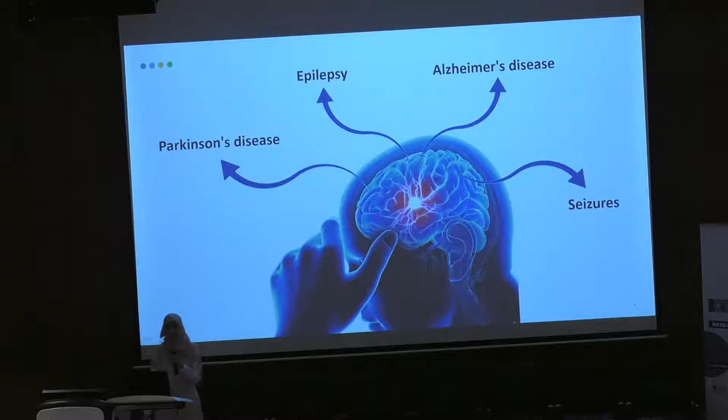Neurological diseases include Parkinson's disease, epilepsy, Alzheimer's disease, and seizures. So a common way to treat these diseases is using prosthetic intervention. When we talk about prosthetic intervention, we consider many issues, including signal resolution, surgical intervention, and host response.

Signal resolution is when we want to record the activity of the cells from a single cell. Surgical intervention is when we want to remove the device from the brain or the neural tissue when the device is not functioning. And the host response is the inflammatory response when the device is not compatible with the tissue, or we have a mechanical mismatch.

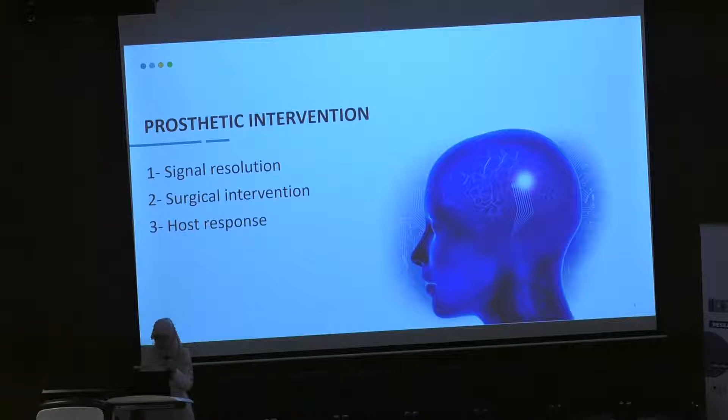So our solution is making an inkjet-printed biodegradable device that is capable of measuring single-cell resolution. Our unique technology depends on inkjet printing. Inkjet printing is a technology that uses piezoelectric material that changes shape when voltage is applied. When the voltage is applied, the droplet of ink is ejected, and we can print some patterns.

What is unique about this technology is that we can deal with low temperature materials, and we can allow a wide variety of materials to be used. It is also suitable for multi-layer deposition.

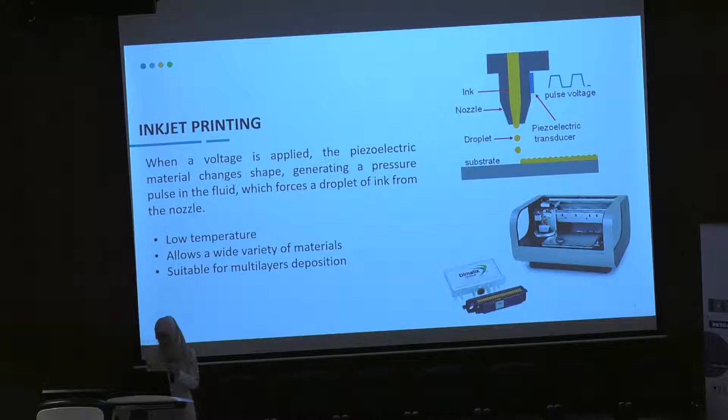When we talk about signal resolution, it means that we want to record the activity of the neuron from a single cell. In order to do this, we need to use microscaled electrodes. However, when we reduce the size of the electrodes, we increase the impedance, and therefore the thermal noise will increase, and we will get a low signal to noise ratio.

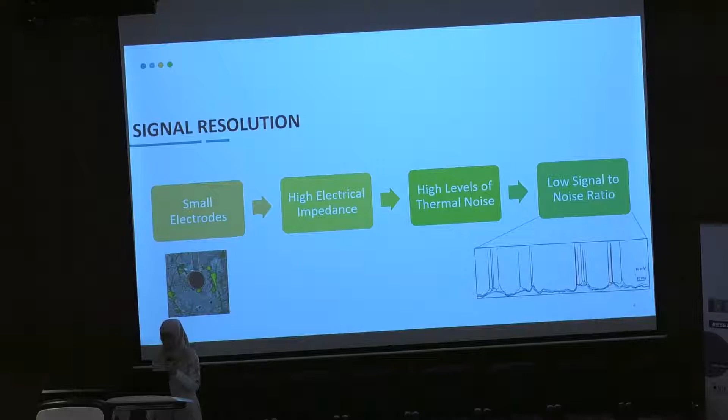To solve this problem, we modify the surface of the electrode by introducing materials that enhance the roughness of the electrode, or we use materials with electrochemical means which enhance the performance of the electrode. In our work, we target both the chemical and topographical approach by depositing layers of a biocompatible polymer called PEDOT:PSS. This material is commonly used, and in our work, we showed how different layers of PEDOT:PSS will drop the impedance.

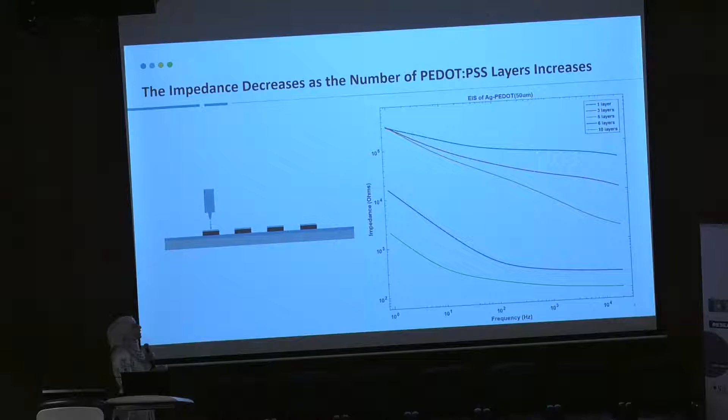So here we have different layers of PEDOT:PSS, and we showed how the impedance is dropping as we increase the number of layers of PEDOT. Not only this, but also the cyclic voltammogram, which is a measurement of the ability of the electrode to inject current, shows that the charge storage capacity increases as the number of PEDOT:PSS layers increases.

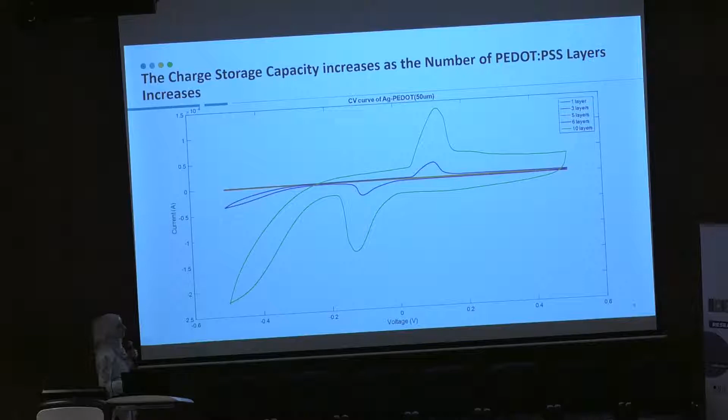The importance of using biodegradable materials comes from the need to monitor the diseases for a certain period of time without additional operations. So we want soft conformal materials with no toxic effects and with less tissue response. This is important when we want to do post-monitoring of the diseases without additional operations.

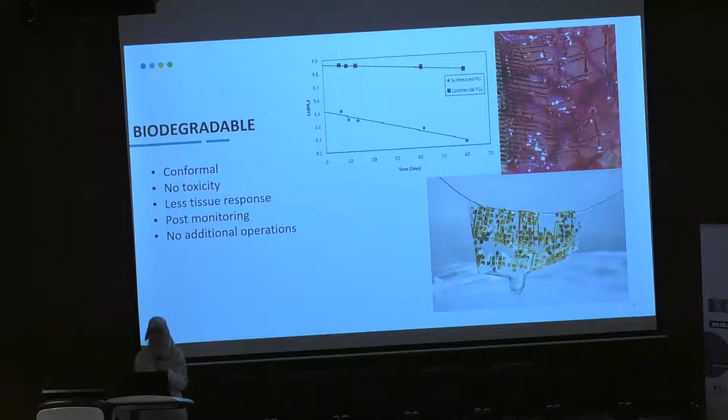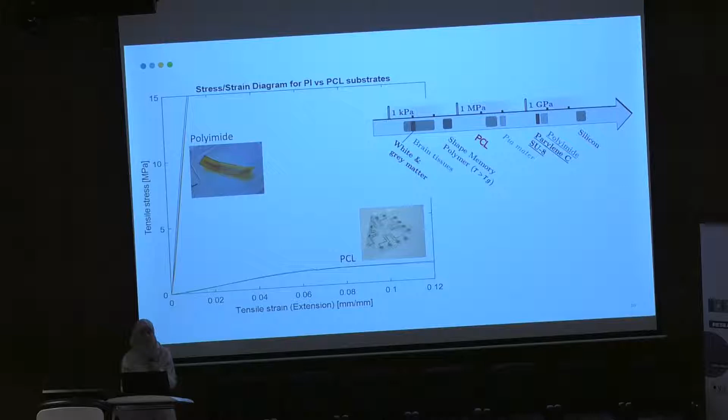Also, since we are using biodegradable materials, they have low melting temperature. So when we want to cure the printed patterns, we use a unique method called photonic curing. Simply, we use a camera flashlight to hit a pulse of light on the printed patterns. This will increase the temperature of the printed inks instantly, within a few milliseconds, without degrading the polymer.

Here we have SEM images where we have silver nanoparticles, which is the ink we are using to print the patterns, and they are not fused well. When we hit them with 2 flashlights, they are fused and they create the conductive path.

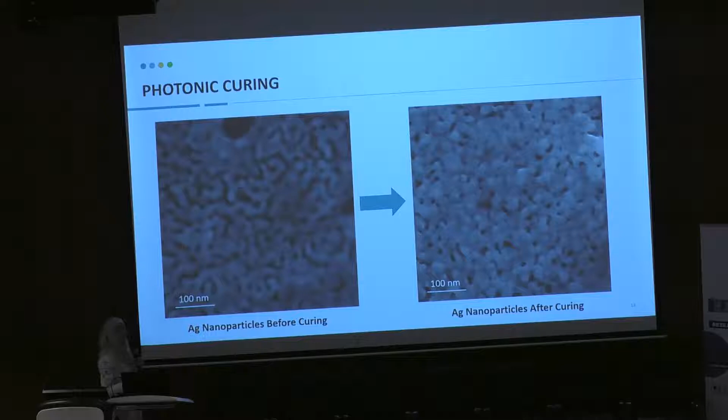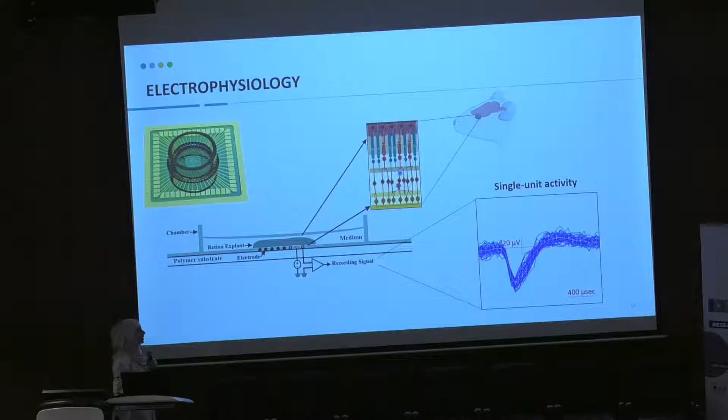To validate our work, we used the printed electrodes to record the electrophysiological activity of the retina from a rat. So we used a multi-channel system. We extracted the retina, and we put it facing the electrodes. And we were successfully able to measure a single unit activity from the retina, from the ganglion cells.

In summary, this work has the ability to establish unique prosthetic devices that are inkjet printed, biodegradable, and able to record the signal with single cell resolution. The results lead not only to scientific publications, but also to solutions that can be clinically used and implemented as the future of neural prosthetics.

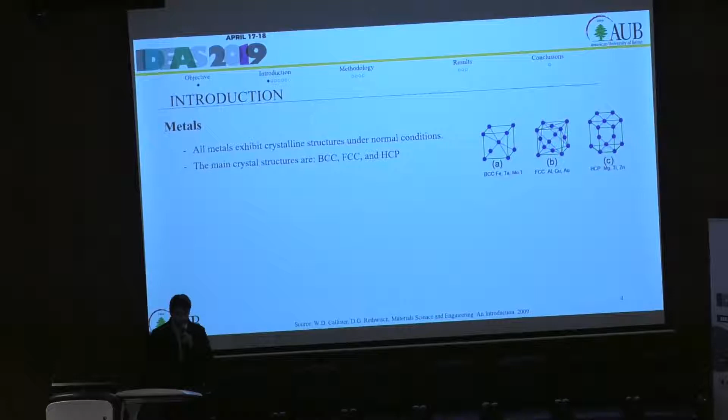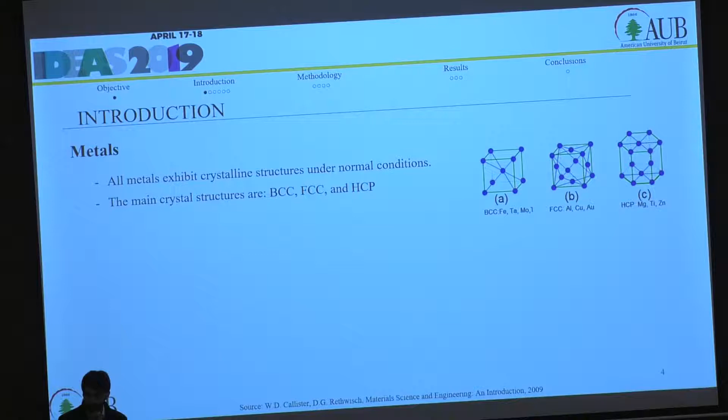So as we all know, all metals exhibit crystalline structures under normal conditions. Metals can exist in one of three main crystal structures, which are body-centered cubic, face-centered cubic, and finally hexagonal close-packed. Repeating these unit cells gives us the crystal, and many of these crystals form the polycrystalline metal.

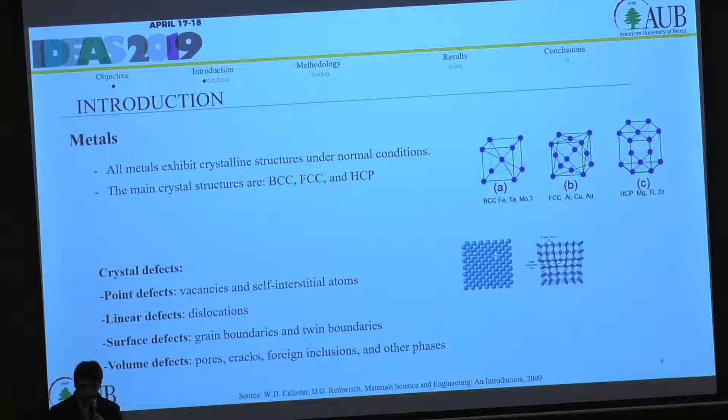However, by nature, the crystals always have some defects, such as point defects (vacancies and self-interstitial atoms), linear defects such as dislocations, surface defects such as grain boundaries, and volume defects such as pores, cracks and foreign inclusions.

So let's talk a little about dislocations, because they are the main contributor to plastic deformation. We have two types of dislocations, the edge dislocation and the screw dislocation. The edge dislocation is an extra half plane of atoms, which is situated above a certain line. The upper region will be compressed while the lower region will be in tension.

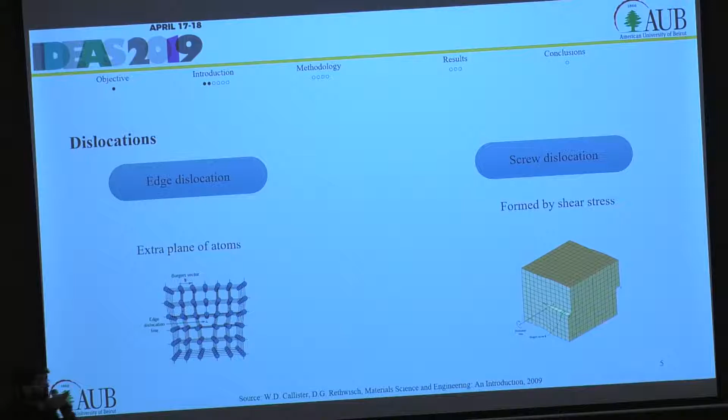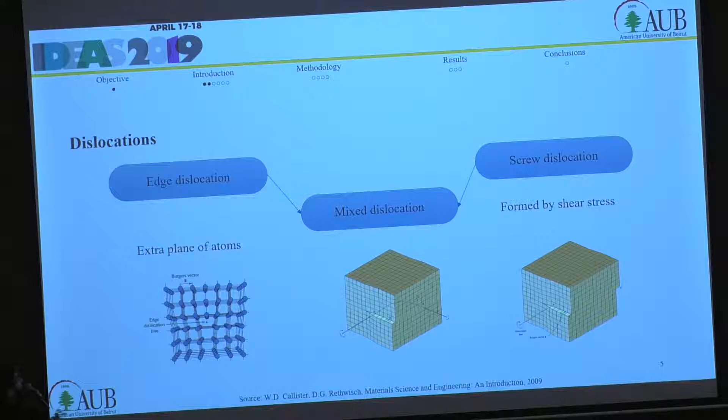The screw dislocation is formed by shear stress, where we have a distortion between the upper and the lower regions of the lattice. And we could have a mixed dislocation, which is a mix of these two types. So we will have edge and screw dislocations at the same time.

So by subjecting a material to a load that exceeds its yield strength, it will undergo plastic deformation, and this plasticity could be seen as the permanent deformation on the macroscopic level. However, at the microscopic level, this can be seen as the movement of dislocations.

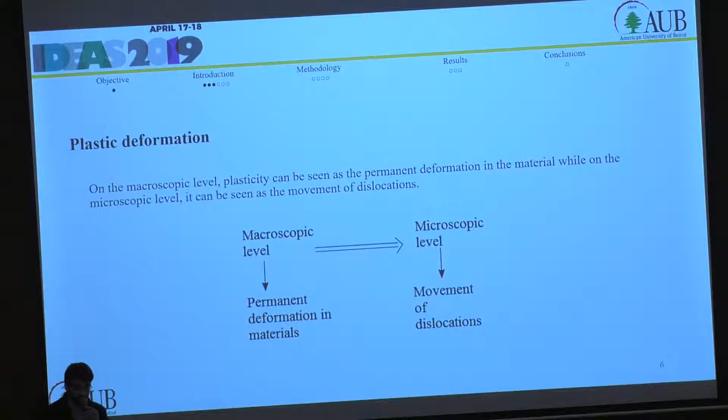So to achieve this plastic deformation, some techniques can be applied. One of the methods is called equal channel angular pressing, where a billet is pressed by a plunger. This process is one of the thermomechanical processes that improves and enhances the mechanical properties. We press the billet between two channels intersecting at a certain die angle phi.

So what happens is we have a simple shear at the intersection plane here, and the grains will fragment, and we will have a drastic decrease in the grain size. Also, several passes can be repeated. And now we will see some microstructural properties that are affected by the ECAP.

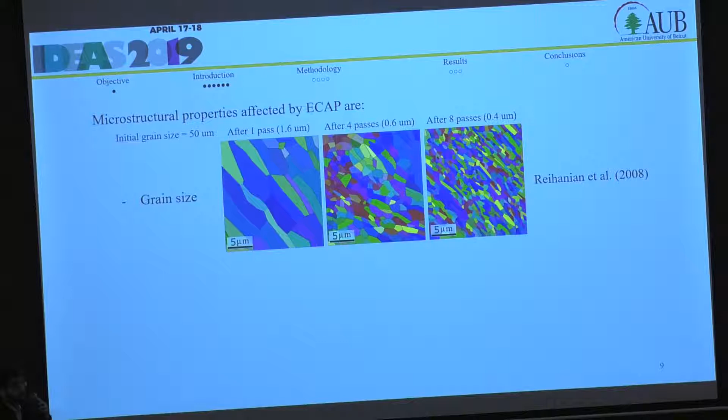We have the grain size. We can see here that the initial grain size is reduced from 50 to 1.6 micrometers just by pressing it one time. And it's known that smaller grains mean higher strength.

Another feature that's affected is the texture. The texture is the representation of the orientations of the crystals within the polycrystal. So the ECAP can reorient the ideal orientations of the crystals inside the polycrystal.

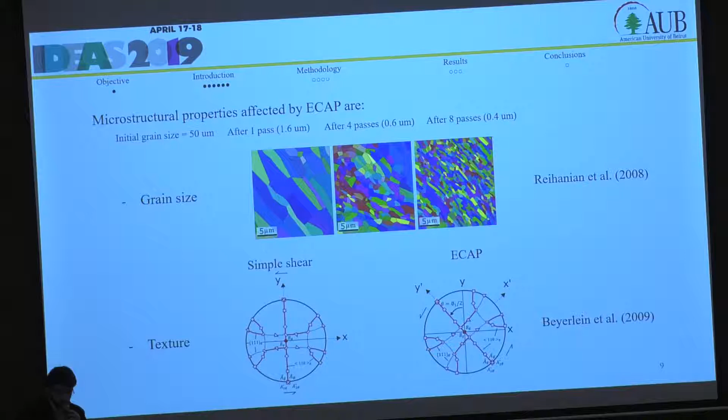So in order to proceed with our modeling, we use the crystal plasticity model, since it captures large strains and severe plastic deformation. And this crystal plasticity model is coupled with continuum dislocation dynamics to capture the dislocation density evolution within the crystals.

Also, in order to average the response, a Taylor-Lin scheme is used to average the stresses inside each crystal, and it's assumed by Taylor that the deformation gradient at the micro scale associated with each grain is equal to the macroscopic deformation gradient. And here we have some constitutive equations.

So in order to implement the grain-grain interaction, which will affect our fragmentation process, we use a concept called GND, or geometrically necessary dislocations. These dislocations are accommodated at the grain boundaries, and they will hinder the rotation of the boundary during deformation.

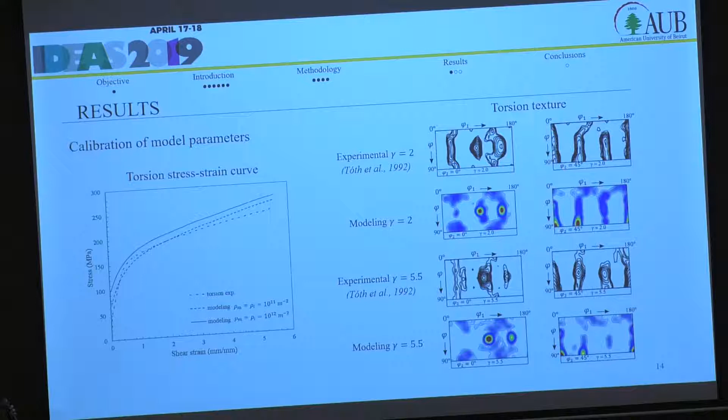Finally, in order to calibrate our model parameters, we have some model parameters that need calibration. Torsion experiments were extracted from the literature, for the same material, of course, and we fit our model with these data, and we get our model parameters with the best fit.

And finally, other important predictions are the grain size. We can see that we have very good agreement between the experiment and the model. We have 1.2 micron for experiment and 1.3 for our model, and so on. Also, the dislocation density evolution can be predicted by our model.

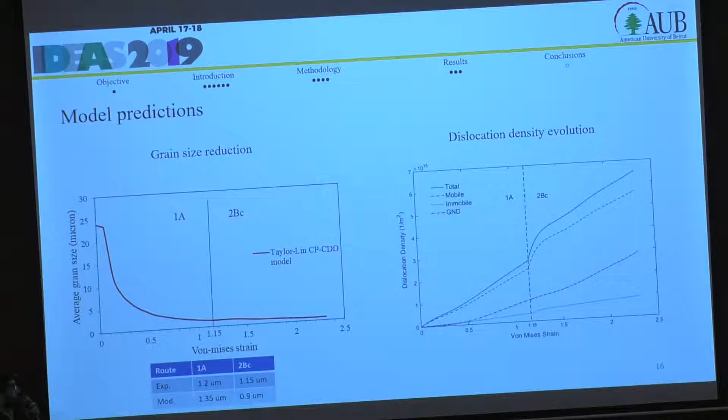In conclusion, the proposed model combined the Taylor-Lin, the crystal plasticity, the continuum dislocation dynamics, and the grain fragmentation model to predict the behavior of FCC metals during ECAP. And the model parameters were calibrated using torsion experiments for copper, and the model captured the main microstructural features of ECAP after 2 passes. And thank you.

Actually, when this billet is pressed, its cross-section is not affected, so we can strengthen this billet or sample without affecting its geometrical shape. However, its strength will be drastically increased, doubled or tripled, but this will affect its ductility. The ductility would be reduced. So the application is for the same material that you need to use in industry or other applications. It could be ECAPed, and we will have improved properties.

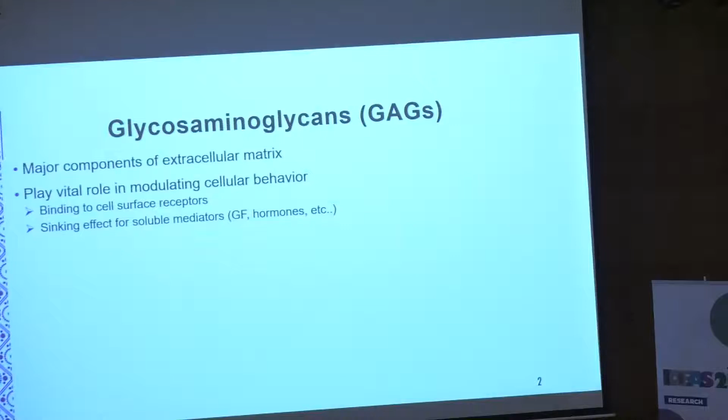So glycosaminoglycans are polysaccharides that are present in the extracellular matrix, and they play vital roles in modulating cellular behavior, mainly through binding to cell surface receptors or by binding to growth factors and inhibiting or allowing the cells to proliferate. They play their role through the sulfation arrangements, which are sulfate groups present in their backbone. We refer to these sulfation arrangements as sulfation codes, and they affect mammary development and diseases, mainly breast cancer. Unfortunately, unlike proteins and lipids, it's very hard to extract these glycosaminoglycans and categorize them according to their sulfation patterns because they are extremely heterogeneous.

So we thought, what if we have something that could mimic these glycosaminoglycans with specific sulfation arrangements and use them to study the development of the mammary cell and assess their effect on cancer cells. For that, we were very lucky because we have alginates, which are polysaccharides extracted from brown algae, and they have a similar backbone to the glycosaminoglycans. We added sulfate groups to them, and we will be referring to the sulfation patterns as degrees of sulfation, ranging between 0, 0.8, 2.0, and 2.7.

And we're going to use a positive control, which is heparin, a naturally occurring glycosaminoglycan with a degree of sulfation of 3. So it's maximally sulfated. And we're going to assess their effects on two cell lines, the normal S1 cell line and the T4 cancer cells, using two models: the 2D monolayer culture where cells are grown on plastic, or the 3D model where cells are grown in hydrogels.

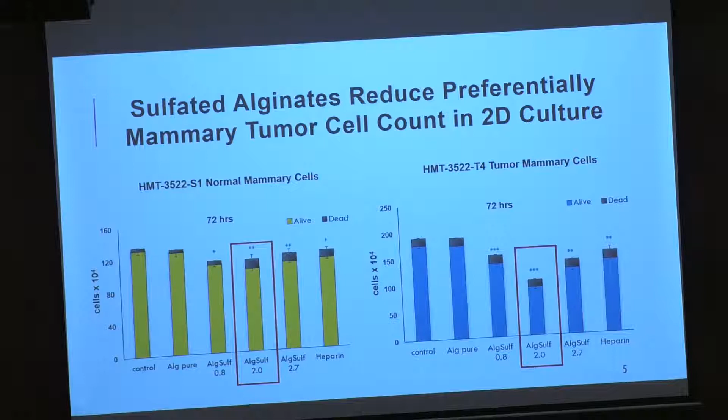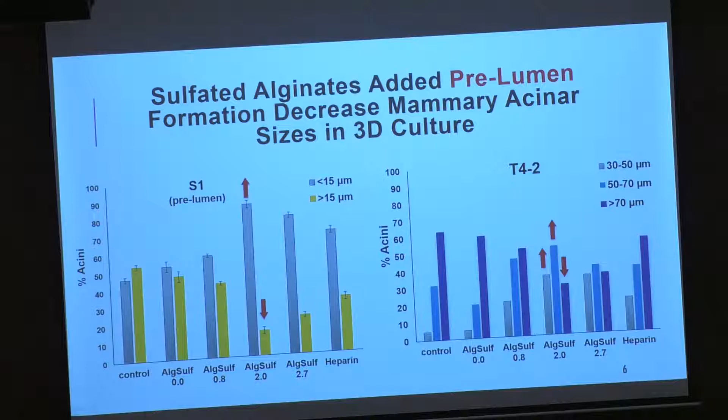We wanted to see if these alginates affect the capacity of the acini to form lumen, and fortunately, it did not. So all the cells with all the conditions were capable of forming lumen, but some of the polarity markers were redistributed from the apical side to the basal side and apicolateral side, both beta-catenin and SCRIB, which are polarity markers that are commonly tested in these cell lines.

But in a real case scenario, if we want to use these alginates as drugs, the acini will be fully developed. It will have lumen. It will have polarity markers that are properly distributed. So to make our theory more comprehensible, we decided to add these alginates post-lumen formation to mimic the physiology of the body. And to our luck, the sizes of the acini did not change at all, and the polarity markers were maintained.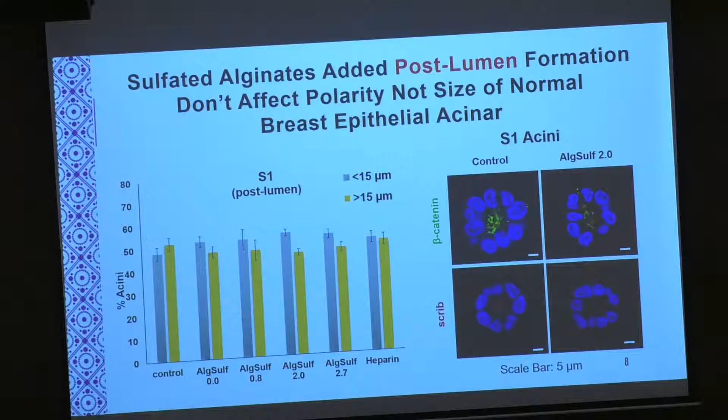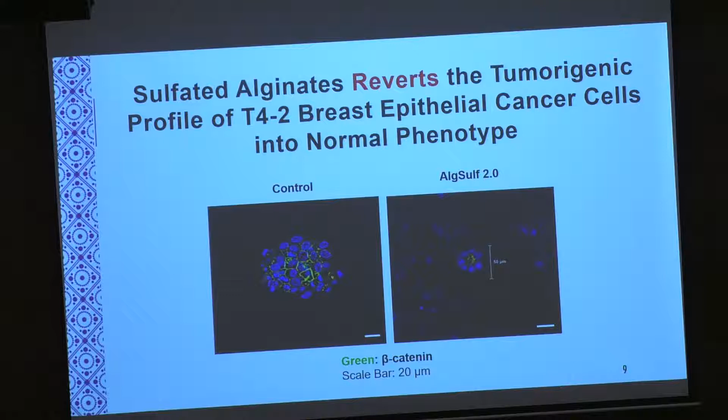A very interesting result we're recently getting is the reversion of the T4 cells. They are forming these flowery-shaped acini. They are having proper distribution of the polarity markers. I'm not really sure the image shows it properly, but it does.

And finally, we're talking all the time that these alginates are preferentially reducing the proliferation of the cancer cells and not the normal cells. So a co-culture system was a perfect approach for us. We cultured S1 cells, and we added on them T4 cells that are GFP labeled. GFP means green fluorescent protein, so they basically fluoresce under a fluorescent microscope. And we counted the number of cells post-treatment. The number of S1 cells, the yellow bars, were consistent throughout. But the number of viable T4 cells decreased dramatically, mainly with the alginate sulfate 2.0.

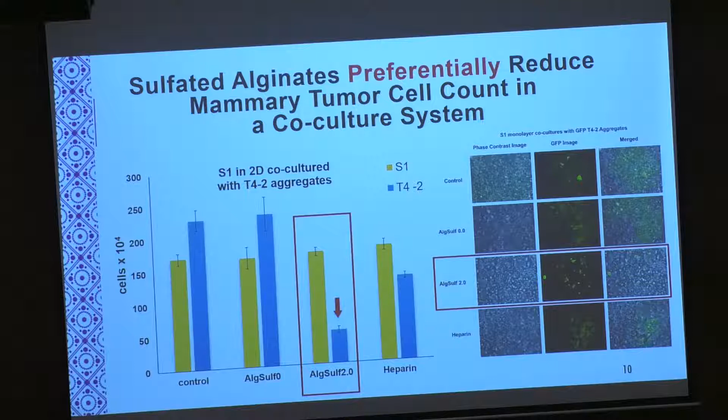So in conclusion, our findings suggest that our engineered biomimetic sulfated glycosaminoglycans preferentially hinder the proliferation of breast cancer cells while maintaining differentiated polarized S1 cells in 3D culture models. And this novel biomimetic approach will enable us to develop potential anti-cancer drugs that can be used in treating breast cancer.

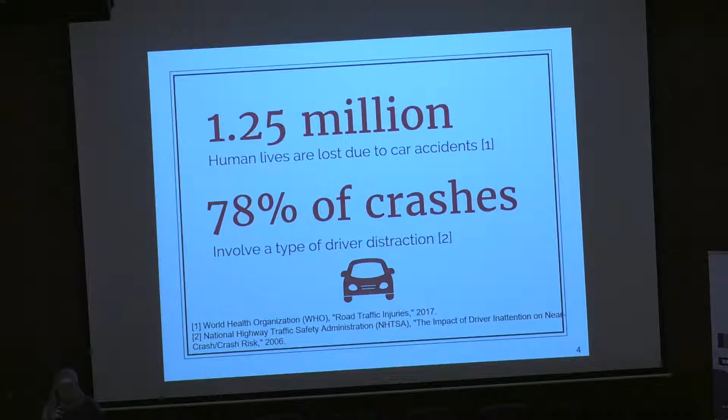So the World Health Organization declared in the year 2017 that car crashes are the leading cause of death for people aged between 15 and 29 years old, and that in 2017, 1.25 million human lives were lost because of car crashes. The National Highway Traffic Safety Administration reported that 78% of these car crashes involved some kind of driver distraction. Now, the Lebanese Internal Security Forces also reported that the leading known cause of car crashes in Lebanon involved some kind of distraction as well.

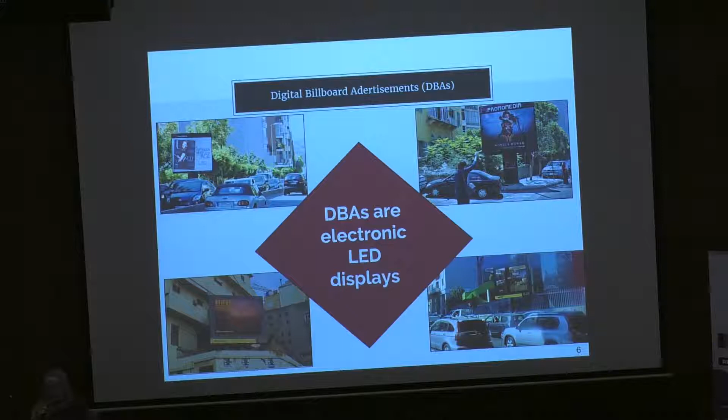So in our research, we are studying the driver distraction caused by digital billboards. These are some images of digital billboards that you might have recognized, placed in the streets of Beirut. So now we're going to state the objectives of our study. Number one, we're going to analyze the effects of different types of digital billboards on drivers' performance and attention. Then we're going to detect drivers' distraction caused by these billboards using unsupervised machine learning, using sensors which include driving performance, eye tracking, and EEG.

Last but not least, at the end of the day, we wanted to propose an intellectual merit, which is to eventually improve road safety by giving recommendations for policymakers to regulate or control how digital billboards are placed.

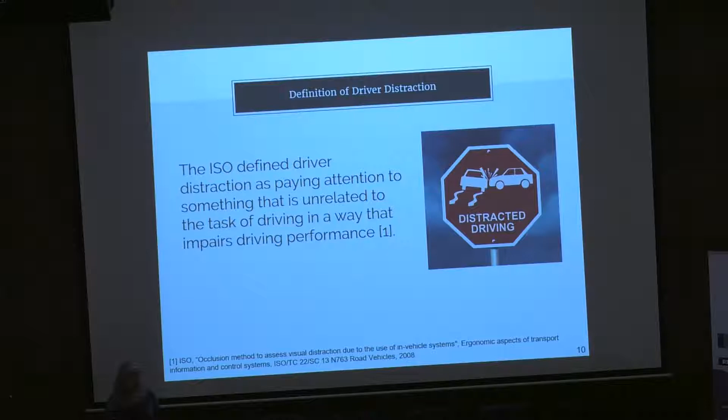So going back to prior literature, what is the definition of driver distraction? The ISO defined driver distraction as paying attention to something that is unrelated to the task of driving and could impair driving performance. Throughout the literature, we can find many definitions for distraction.

The National Highway Traffic Safety Administration categorized 3 types of distraction: visual distraction, manual distraction, and cognitive distraction. Visual distraction is having the eyes off the road. Manual distraction is caused by having the hands off the steering wheel. And finally, cognitive distraction is being mentally unfocused on driving and thinking about something unrelated to driving.

Previous work on driver distraction focused mainly on distraction caused from within the vehicle, such as using mobile phones, navigation systems, or talking to passengers. Less consideration is given to distraction caused by the outside environment of the driver. That's why we are focusing on digital billboards causing distraction.

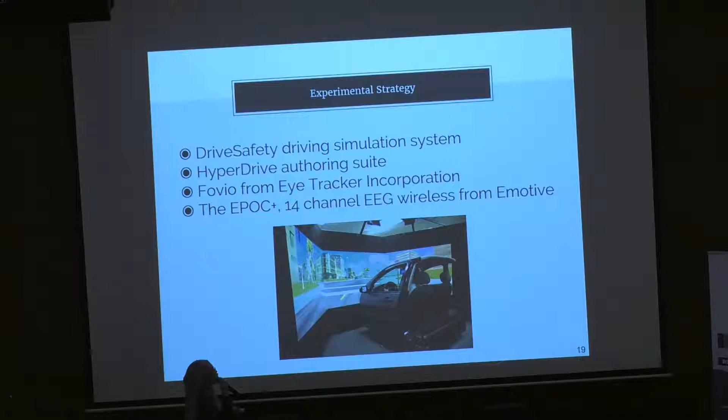The experiment setup was made up of a driving simulation system, the eye tracking device, which was placed on the dashboard, and the 14-channel EEG headset. This was the scenario that the drivers had to drive through. We included 27 different billboards: 9 static billboards, 9 transitioning or changeable billboards, and 9 animated billboards. These billboards were controlled so that the driver would see one billboard at a time.

The independent variable in our study is the format of the billboards, whereas the dependent variables were the performance metrics, eye tracking metrics, and the EEG. For the driving performance metrics, we used average speed, average acceleration, deceleration, average deviation from the center of the lane, and average reaction time to traffic lights where the billboards were placed at the intersection.

For the eye tracking, we used average percentage of fixations on the road, average percentage of fixations on the DBAs, which are the billboards, the average fixation duration on the billboards, and the average number of gazes on the DBA. What we mean by the average number of gazes is how frequently the driver was looking at the DBA.

For the EEG metrics, we used EEG band powers, which throughout the literature have been shown to be related to distraction. So now I'm going to present the summary of our findings.

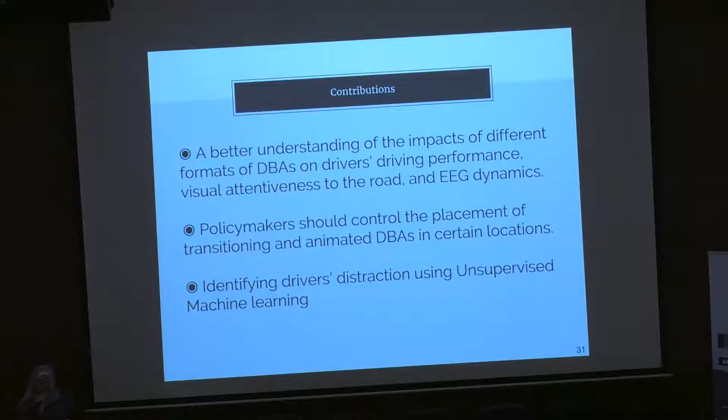And at the end, we used unsupervised machine learning to classify between distraction and not distraction. This way, we allowed the data to speak for itself instead of setting rules, labeling the data, or setting a criterion that above this point it should be classified as distraction or not. So we used the unsupervised machine learning technique so the data can speak for itself. Thank you.

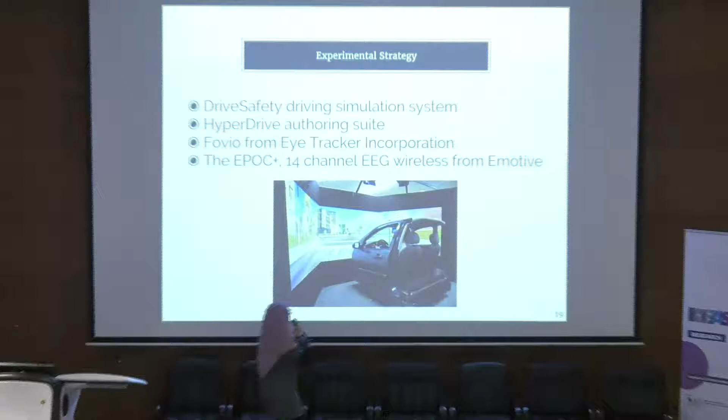I mean, just in terms of how, is it actually a screen they're looking at with the billboards? Or are you placing real digital billboards? So basically, if this is the road, you would see in the screen there's a billboard placed. Okay, I understand. Now I saw that. Yeah. Okay, thank you.

So what did you use as your control? You mentioned, for example, deviation from the center of the road. Was there a group that went through the simulation with no billboards? Yeah, so all of the participants drove through the experiment. There were locations where they did not see any billboards at all. So this was the control that we used. So the same people in the experiment were subjected to different... Yes, exactly. All of the participants went through the whole scenario that included the 27 billboards.

And this looks like an urban setting. Yes, it is an urban setting. Do you have a mode where they can be on a highway, for example? Yes, we can control that, but I didn't include that in my studies. Through the software, you can determine which type of road you want to include. Because I would imagine distraction would be higher in an urban setting than a highway, obviously. Yeah. Any other questions?

Thank you very much for this talk. It's very interesting. Did you do any tests on time of day, like if it's night or day? Right. So as we said, it was simulated driving, so we only included daytime. But it would be really interesting to see nighttime and daytime. This is one of the limitations of the work, because one of the most distracting things about billboards is their brightness at night. Unfortunately, we were not able to study this because of the limitation of the instrumentation that we have. Thank you. Welcome.

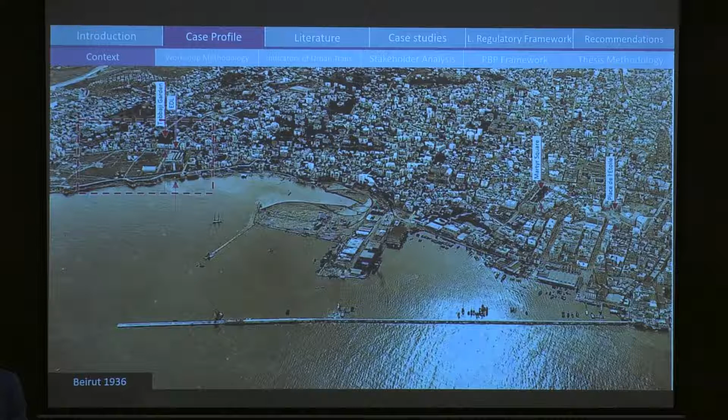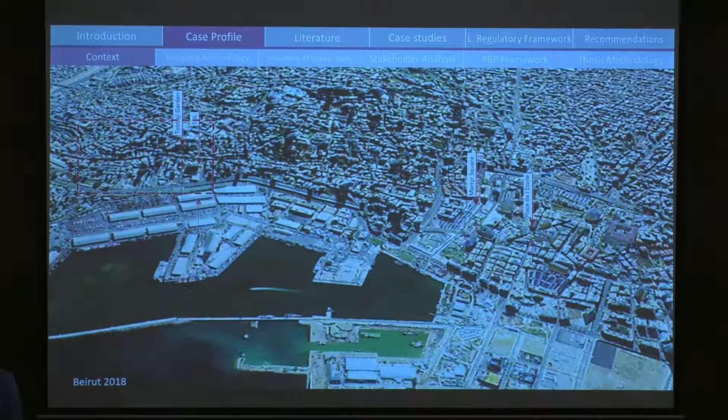A huge transformation took place not just at the level of the neighborhood, but also at the level of the city, the expansion and transformation. So we can see that before, the location of the tramway, it's the same location of the EDL. So this is in the box here, it's the Mar Mikhail neighborhood. Looking from the lower part of the neighborhood till the upper part, we can see the mushrooming of the new developments, the real estate development.

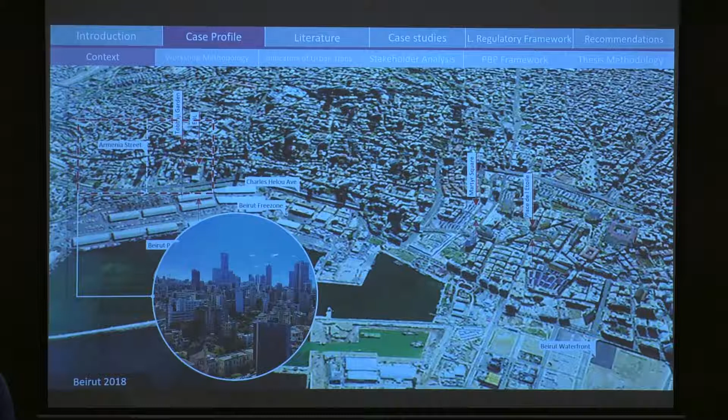So I was exposed to Mar Mikhail through the urban planning workshop that we did, and it's a course we take in the department. It's like a 6-credit course. So we do like a documentation of urban form and structure. We do historical evaluation of the area, mapping urban morphology, social makeup, local business, real estate market, main stakeholders and actors. Then we do the analysis, the vision, strategy.

But we were exposed also to participation. So we did within the workshop a workshop mitigating gentrification through a participatory planning approach. So what we did, we went to Mar Mikhail and we did like focus groups, we got the issues, and we did the vision, the objectives, and then the development principles.

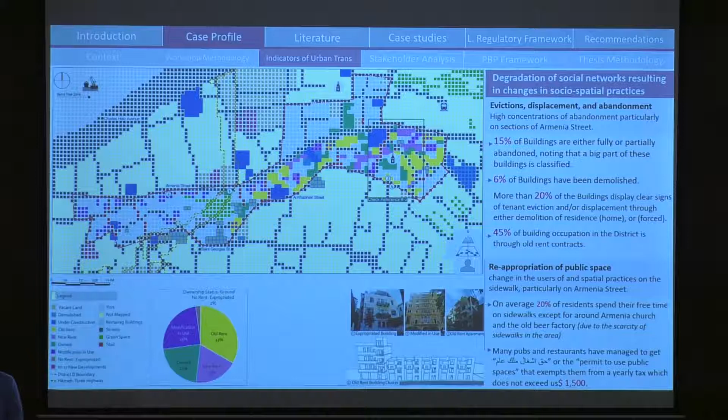What's happening in Mar Mikhail? So I did these maps. It's like pixelated maps to see transformation in the sense of density. So we have degradation of social networks resulting in changes in socio-spatial practices. So we have evictions, displacements, and abandonment. 15% of the buildings are either fully or partially abandoned. So these at this level.

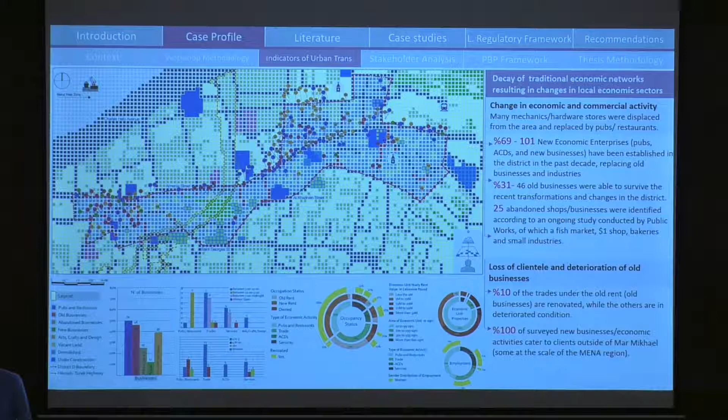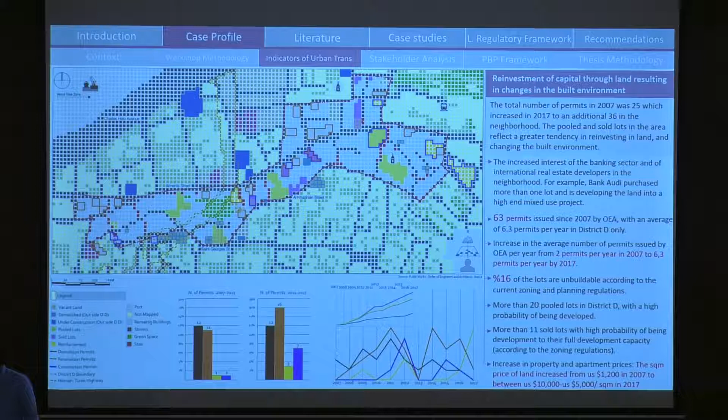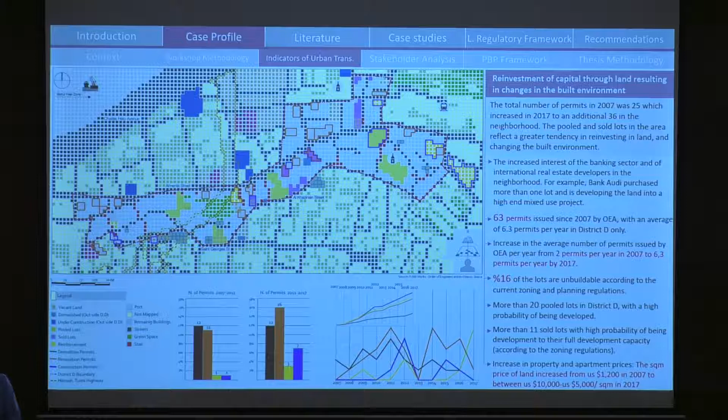Regarding the real estate development, what's happening? We have reinvestment of capital through land, resulting in changes in the built environment. Okay, what the graph shows is that from 2007 till 2017, we have 63 permits. The majority of these permits are for demolition and for new developments.

Okay, so I'm questioning the logic of the Lebanese regulatory framework here. So we can see that these tools in Lebanon have been here since the 50s, put in place during the French mandate, inspired by the French. And even France now itself moved away from these tools. They shifted, and we are still working on the same tools. So the rationale, in all the amendments and the regulatory framework, was to maximize the space of the development in order to maximize profit or capital.

Okay, so what I did in my research, I investigated case studies that get away from prescriptive rigid systems and adopted qualitative performance criteria and objectives. So the criteria behind my case studies was, I went abroad and investigated the performance approach, where the performance code is not related to the building itself. However, it is related to other criteria such as livability, inclusiveness, character, effectiveness of the neighborhood.

What is performance-based planning? It's like a policy instrument. First of all, it's a policy-based intervention, not a direct intervention. So it's a policy instrument. One of the policy instruments is regulations. So it's an urban planning regulation. So we use it to regulate the market and the built environment. So in regulations, we have two: either the prescriptive, which requires all cases to meet predetermined norms, or consider each case on its merits, which is the performance-based planning.

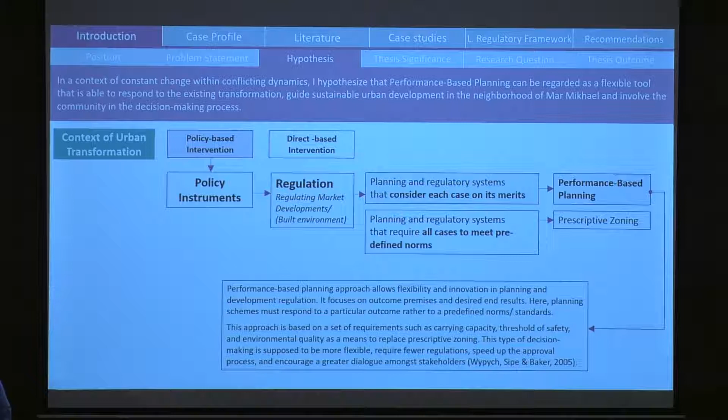So the performance-based planning approach allows flexibility and innovation in planning and development regulation. It focuses on the outcome premises and desired end results. Here, planning schemes must respond to a particular outcome rather than to predefined norms or standards. So this approach is important because it also allows a greater dialogue among different stakeholders and participation in the decision-making process. So when we talk about performance-based planning, we have a performance code.

What do we mean by a performance code? So the performance code, first of all, we start to perform not just the building itself. We can start to perform neighborhood planning, physical infrastructure, stormwater management, streetscape, neighborhood character, site planning. In the site planning, we can perform site planning, lot layout, street setbacks, building envelope, private open spaces, safety and security, design for climate. So we start to perform issues that are not just at the level of the building, but more about livability and even inclusiveness of the neighborhood.

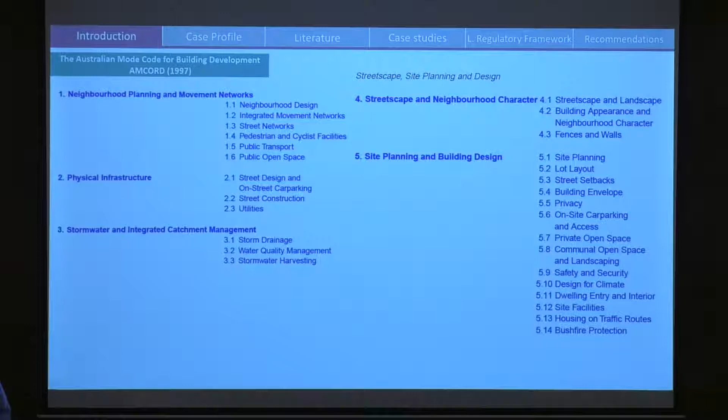We then have the performance criteria and acceptable solutions. The performance criteria is a general statement of the means of achieving the intent, and it provides designers and developers with an opportunity to develop a variety of design responses. So we have a set of acceptable solutions. And here comes how it is innovative and flexible.

So in the best practices, we have the zoning code. The zoning code is usually about lot subdivision, use, bulk, density, design. And in the building code, the best practice is like the IBC, International Building Code. It deals with structure, fire, egress, accessibility, light, ventilation.

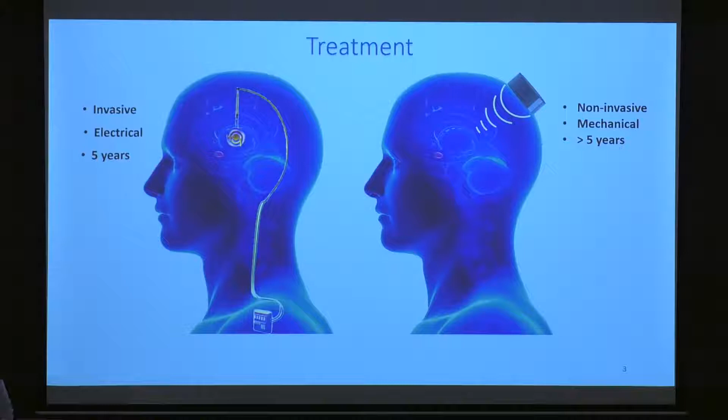In our lab, we believe that there might be another solution through ultrasound mechanical stimulation. This solution is non-invasive. The device can be inserted outside of the brain. It is purely mechanical, and it has the chance to last more than 5 years because it does not damage the tissues electrically. But the mechanism of ultrasound treatment is not very well known, and this is why we tried to develop a mechanical model to see the effects of ultrasound stimulation on neural networks.

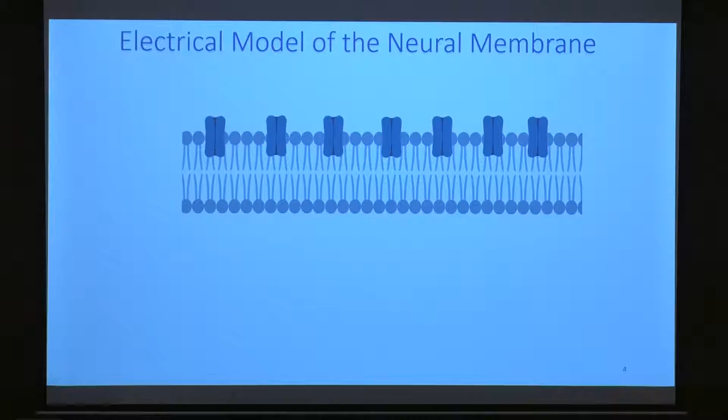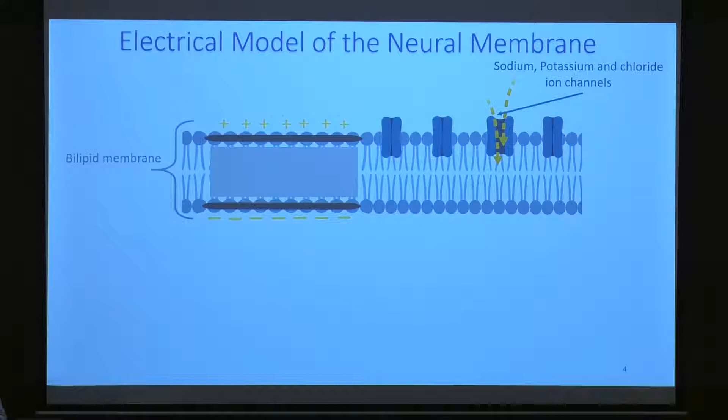To begin with, the nervous system is currently modeled as an electrical system. In this figure, this is the neural membrane. It is made of the lipid bilayer membrane, with sodium, potassium, and chloride ion channels embedded in the membrane. Charges accumulate on both sides of the membrane with an insulation between them. For electrical engineering people, you would directly say this is basically a capacitive circuit: an insulation between the two plates and charges on both sides. As for the ion channels, they allow the flow of charged particles inside and outside of the membrane, so this can be modeled as a varying resistor.

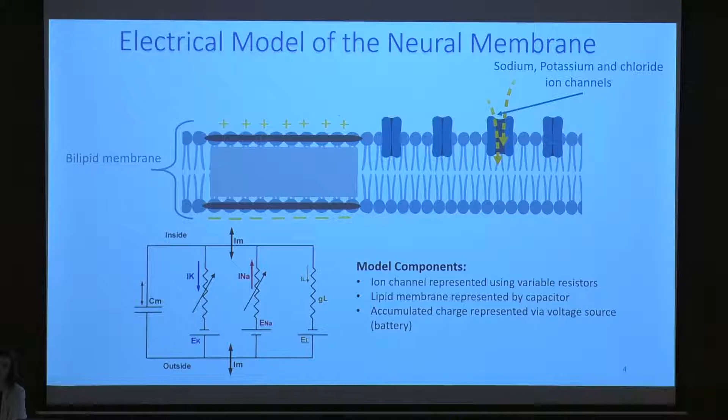So the famous Hodgkin and Huxley model models the neural membrane of a single neuron as follows. The capacitor shows the insulating part of the lipid membrane, and the ion channels are represented using variable resistors. As for the accumulated charges, they are represented using voltage sources. And since we have several types of ion channels, sodium, potassium, and chloride, they are shunted in the circuit.

So our biomechanical model considers 3 main components. The first is the voltage-induced membrane tension: there's voltage in the membrane, and it changes during an action potential, which causes tension to vary in the membrane. The flexoelectric effect, which is basically due to the nature and the curvature of the membrane; oscillations occur and cause currents to be produced. And there's the ultrasound-induced membrane tension, which we will discuss thoroughly later.

These mechanical effects actually affect ion channels. They cause the ion channels to open and close or affect their normal behavior. And this is how the mechanical model will be coupled into the electrical Hodgkin and Huxley model.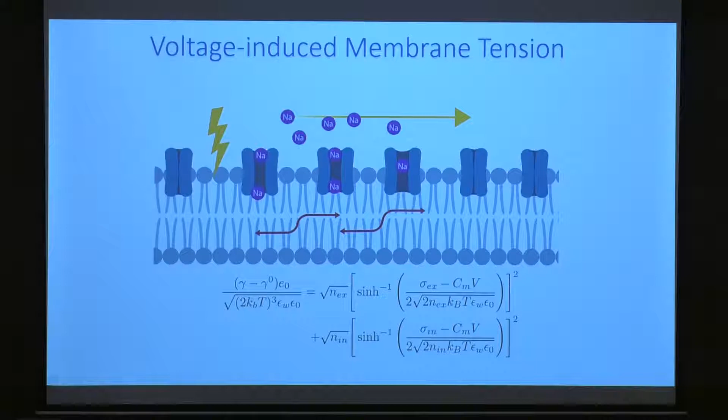As for the ultrasound-induced membrane tension, we know that the ultrasound basically causes a tension force in the membrane where it is applied. As you notice, there are two different arrows in this figure. One is bigger because the effect of the ultrasound tension is actually greater than the effect of the tension caused by the variation of the potential across the membrane.

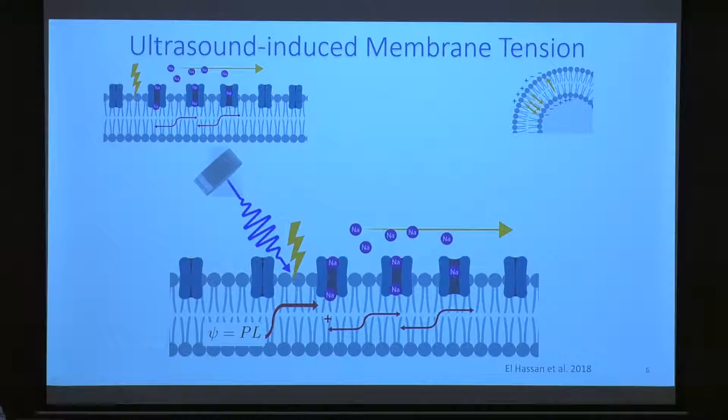So our model studies the possibility of modulating neural networks using ultrasound stimulation. But ultrasound stimulation has many parameters. It could be pulsed or continuous. It can have low frequency or high frequency, and it can vary also in intensities.

Whenever the model simulates all of these parameters and gets out the tension that comes from an ultrasound signal to the membrane, then this tension, as I previously said, changes the intrinsic energy difference in the membrane, which affects the probability of the ion channels to be either opened or closed, or alters this value. And then this probability controls the conductances of sodium, potassium, and chloride ions, which affect the firing rate and the action potential in the Hodgkin and Huxley model.

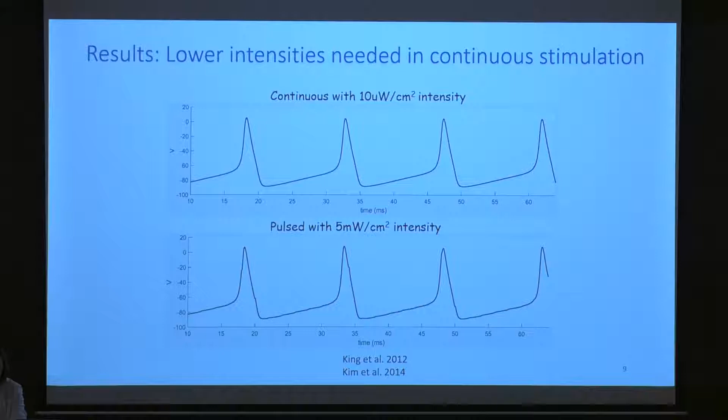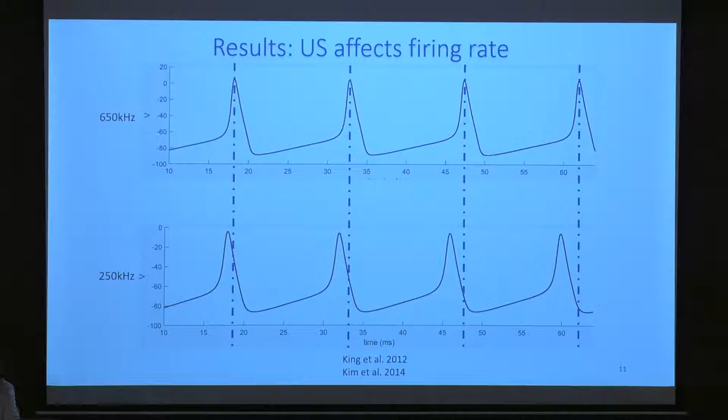And we also noticed a change in the ultrasound firing rate. So the upper graph shows the action potential when stimulating using a continuous ultrasound signal of 650 kilohertz, and the lower one shows 250 kilohertz. And we can notice a difference in the timing where the maximum or the spiking occurs. And this was also shown in some published experimental data.

Our next step would be actually doing ultrasound stimulation experimentally. We will get an ultrasound input signal, whether it's pulsed or continuous, high frequency or low frequency. This signal should go through an RF amplifier, and then it would feed into an ultrasound transducer. Once we have the signal and its acoustic properties, we could actually try the signal on an animal model, whether the central or the peripheral nervous system, and check for electrophysiological responses.

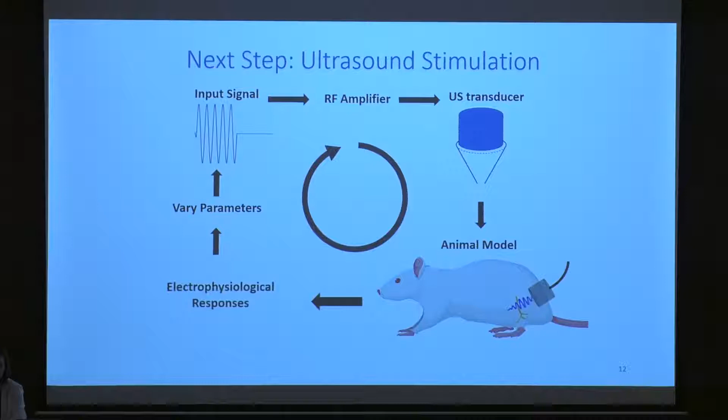And then we would vary the parameters again. Whatever we tried, we could go through something else, and we could do the process all over again to check for each parameter what is the response of the neural network. And thank you.